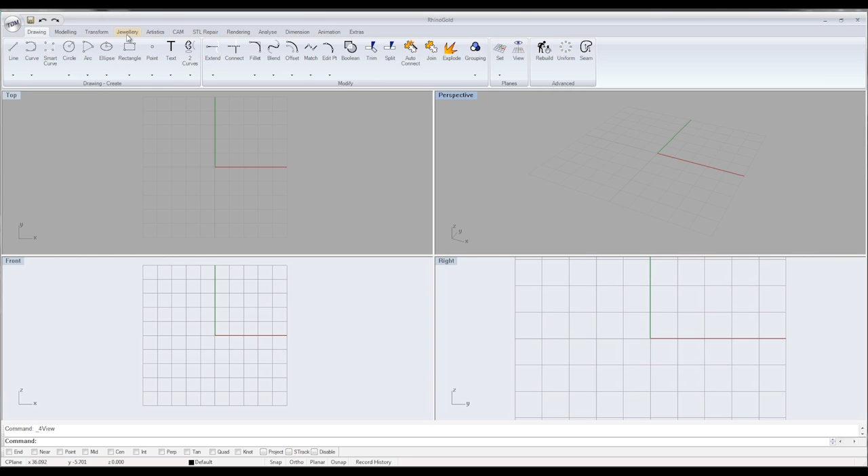In Rhino Gold, I'm not going to go over how to use Rhino. It's not a software that many readers of 3D World are necessarily going to be familiar with, but it's important to see how this process works. The plugin itself creates a ring wizard, essentially.

You can choose essentially what size ring you want to create. In my case, I know my ring size is a size S. Now this is British sizing because I'm in New Zealand, we use British sizing here. If you are in the US, you might be using a numerical system. If you're in Europe, you'll be using a numerical system too, but a different one. And if you're in Japan, you have a Japanese numerical system.

Depending on where you are in the world, that's the kind of sizing gauge you'd want to look for. It's not so difficult to figure out, because you can just go online and search for something like ring size diameter in Google, and pull up a list of different ring sizes. If you go to a local jeweler, you'll be able to find out your ring size. There are also little ring size measurers — we have one on our website as well, where you can find out your ring size from a current ring you already own, or based on your hand size in general.

So it all works out really nicely, you can easily figure out your ring size. In my case, I'm working in British units, and my ring size is S. So I would come down here and find S, and it tells me the diameter in millimeters. Basically, when we're working in jewelry, because we're working in small things, we work in millimeters. So the diameter is 19.1, and I would also normally create this with a particular width.

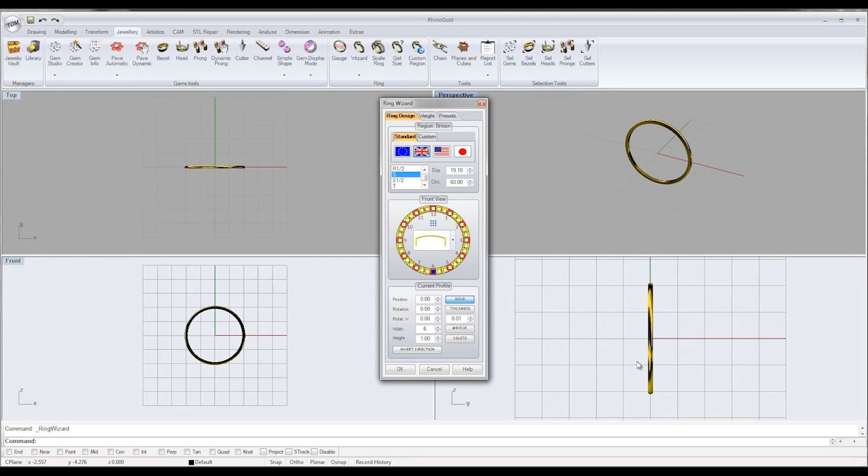Now, how wide is a ring meant to be? Well, that really is up to you. This is going to be basically a men's ring. Men's rings typically are in the range of 5 millimeters wide or wider. I think for the purposes of making this dragon head, we need a bit of width, a bit of a base to work from, so the head has something to stick onto. So I'm going to create a ring that is 6 millimeters wide, and it automatically generates that here for me.

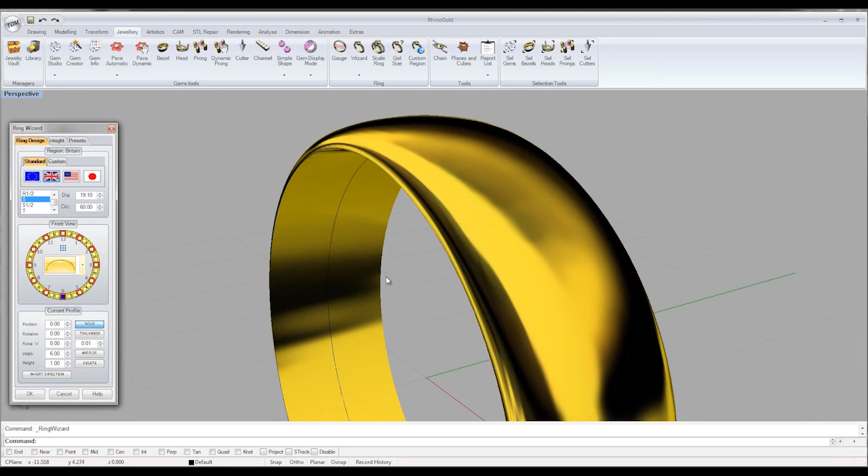I also want to determine the profile of the ring itself, since that's the shape generated from the interior circle. Right now the default profile is a slightly domed shape, but I want to create a true half dome instead, which creates a flat bottom and a half dome shape at the top. I'll push the height up a bit more so it sticks up slightly more than before. Normally I'd generate the NURBS geometry here, and if bringing this into ZBrush, I could export it as an STL or OBJ.

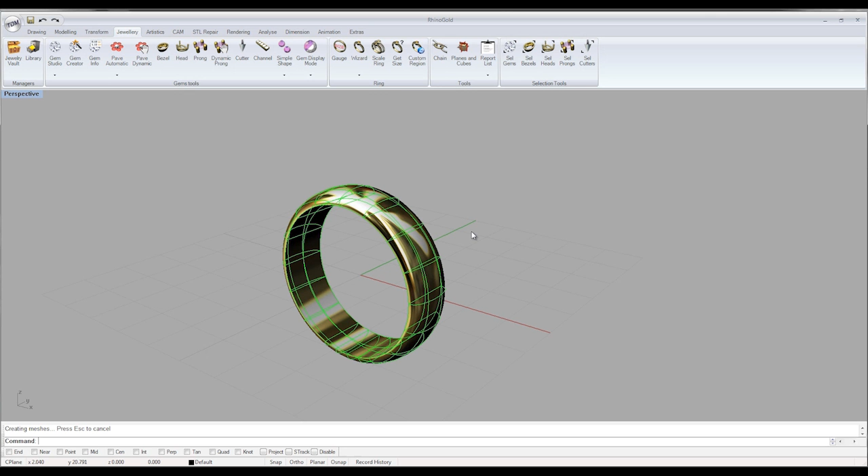Now what I'm going to do is actually model this in Maya, because I think that's going to be more useful to the readers of 3D World, and I'll give you some tips to make this easier. So let me close out of this and pop over into Maya.

The first thing we need to do in Maya is make sure our units are set up appropriately, since Maya's default units are centimeters, which is too big for us. I'll go into settings, click the animation preferences button next to the auto key button, and change the scene settings from centimeters to millimeters, which makes the grid look a lot smaller. That's about the only change we need at this stage.

I'll save that, and now if I come into my ortho views, let me turn on the grid for this one, I can see a tick or two lines crossing for every one millimeter of measurement.

Back in Rhino Gold, the ring we were creating at size S was 19.1 millimeters in diameter. We're going to try to replicate that here in Maya. It's very simple to do.

I'll pop back into Maya and create a NURBS primitive. I'll get rid of interactive creation since that wasn't the default and I dislike it. So I'll create a circle and go to the option box, this way I can type in exactly what I want - you can see I've done this before, so I'll just reset the settings.

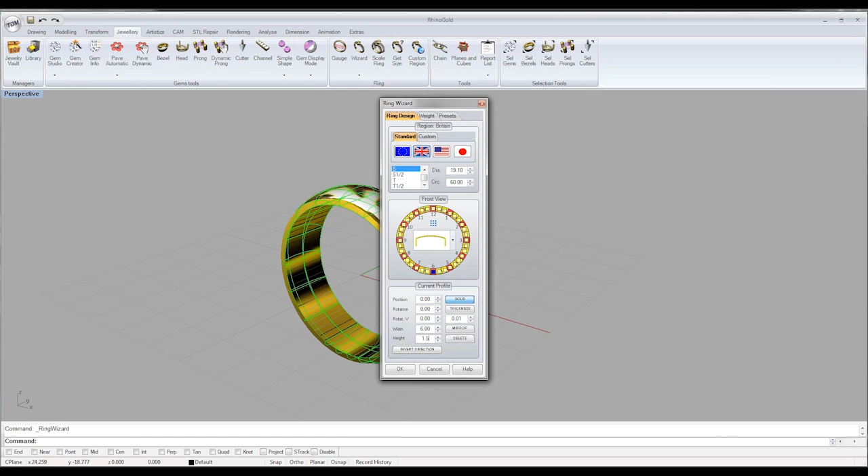And one thing to notice is that this is actually 1.5 units tall. Again, that comes back to when I was setting up the height value here, we set this to 1.5. That's just trying to show you how all these parameters relate to each other.

Now, as I go about this, I'm going to create a curve here using the CV curve tool. And I'm just going to go ahead and turn down the alpha gain here a little bit. I just need to see that in the background, but I don't need it to be so dark. So I'm going to go into create CV curve tool.

Just some basic settings on there. It's cubic, and yeah, that's all I need to really worry about. So I'm going to start up at the top here, and just going to place a few CV points around the curve. They don't need to be 100% precise to begin with.

And as I get closer and closer down to where this curve is starting to change direction into this 90-degree angle, I need to have a higher concentration of points essentially to make this rapid change convincingly. It's going to be slightly round. It's not going to be perfectly hard, but that's okay. We don't necessarily need it to be perfectly hard.

And I'm just going to bring this over. It's close enough if I get right onto the grid line. I'm not 100% concerned about it snapping right onto the grid line because we're going to basically end up blending this a little bit with some of our later functions.

Okay, so I'm just going to go in here and I'm going to start to make some adjustments to this curve. I'm just going to right click on the curve and go to the control vertices and just start moving these individual CV points around so that we get this curve sitting a bit more nicely on the drawing.